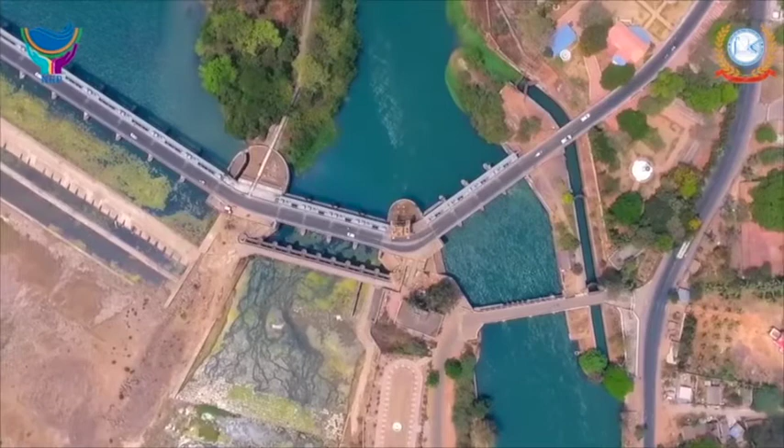Surface water level instruments. Water level measurement plays an important role in water resources management. In case of reservoirs, lakes and other water bodies, water level is used for determining available storage. In case of flowing rivers and canals, the water level represents flow rate.

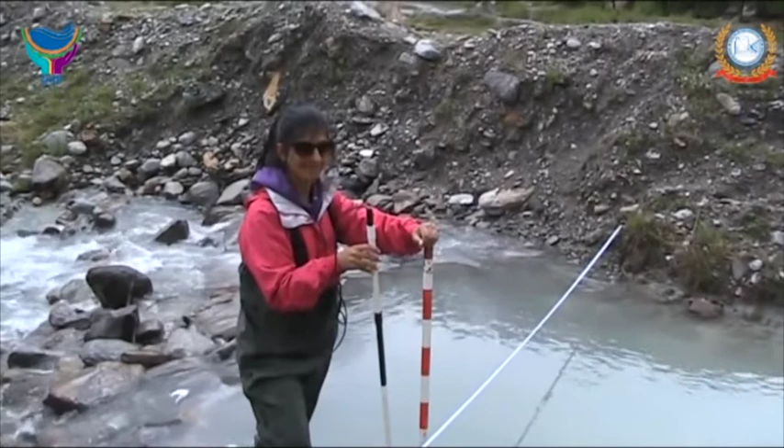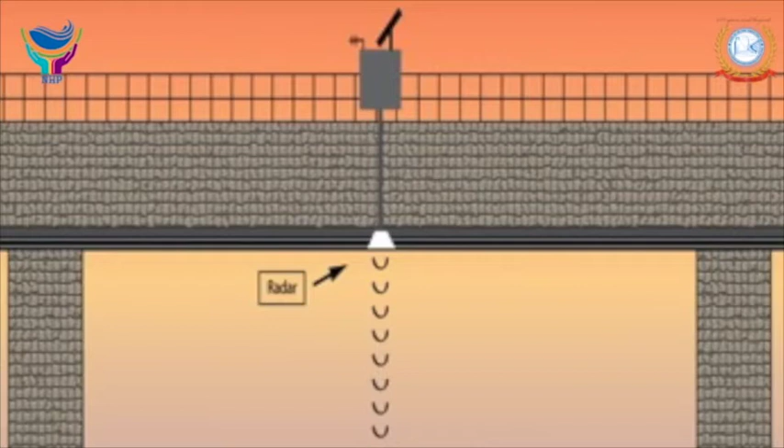There are several common methods to measure water level. Each method has advantages and disadvantages, along with the cost for purchase, operation and maintenance. There are two types of water level sensors: contact type and non-contact type. In non-contact type water level sensors, level is measured from a height as distance between instrument and water surface.

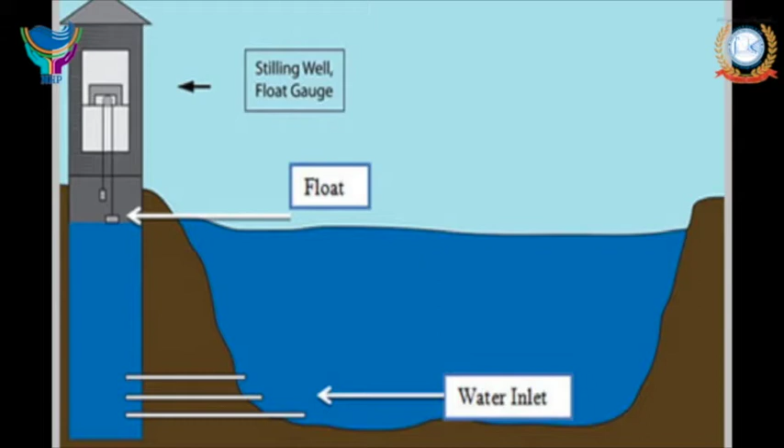In contact type water level sensors, the instrument is in direct contact with water and the water level is estimated as thickness of the water column above a reference level by measuring pressure exerted by the water column on the instrument sensor.

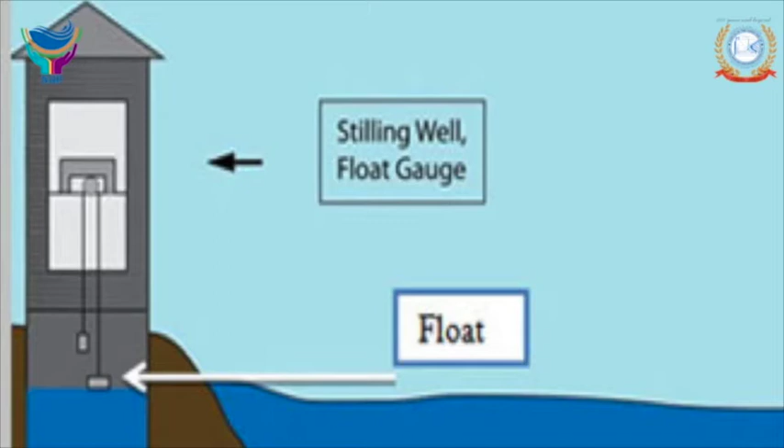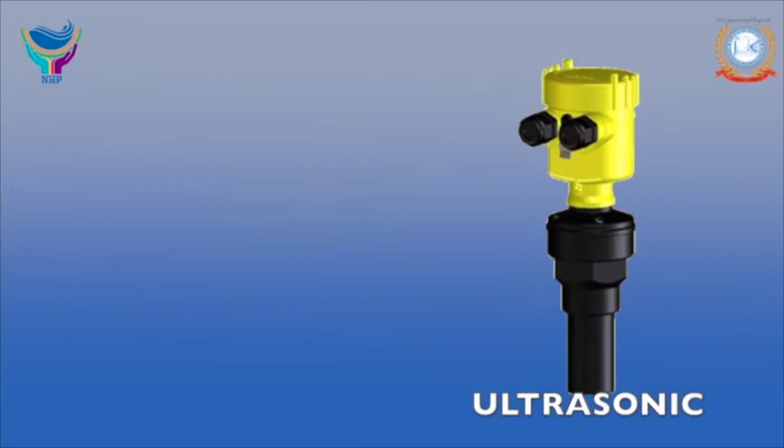A more modern approach to stage measurement has been introduced with ultrasonic and radar distance measurement sensors. And if it is feasible to move the site to a nearby bridge, these are preferred. Ultrasonic distance measuring sensors are comparatively inexpensive.

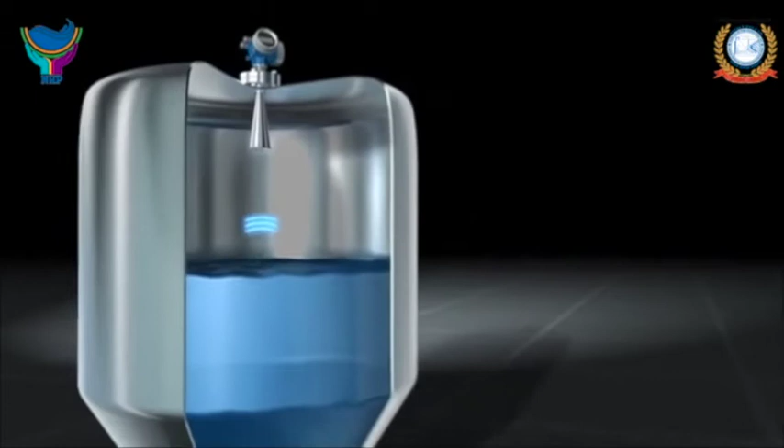The sensor measures the distance of target objects, that means water surface, by sending pulsed ultrasound waves at the object and then measuring the time for the sound echo to return. Knowing the speed of sound, the sensor can determine the distance to the object. The operator needs to know the exact elevation of the sensor and then subtract the distance to the water from the elevation of the sensor to arrive at stage.

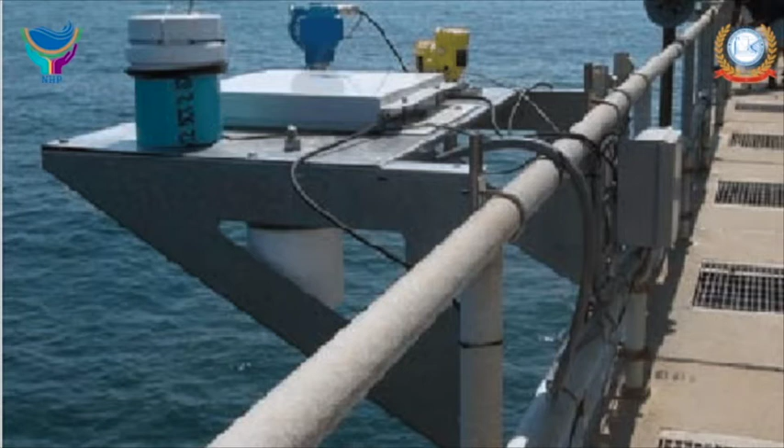The ultrasonic measurement of water level is one of the most sustainable approaches to measuring water level. It is a non-contact method of water level measurement, which means that what flows in the water and any water pollution will not interfere or otherwise foul the sensor.

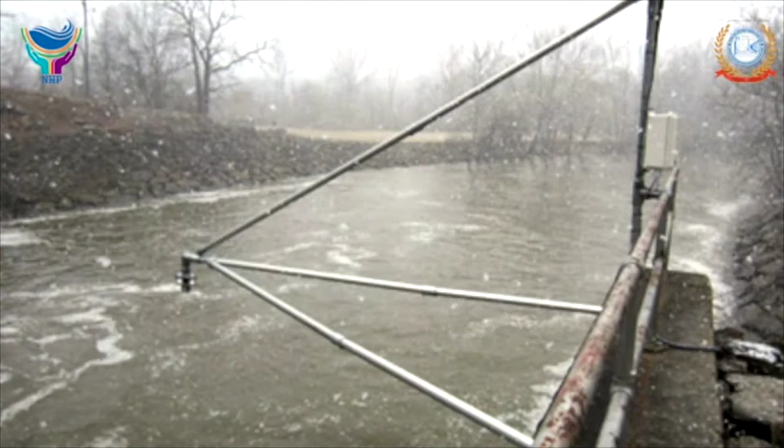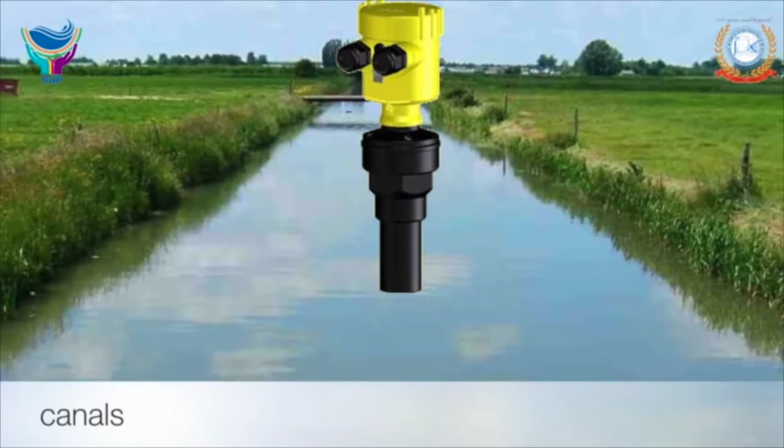The limitation of this method is that you need to make this measurement directly over the body of water being measured, which is not practical in reservoirs or rivers that have shallow slopes. The ultrasonic measurement is also a narrow-range sensor, limited to 10 meters in most applications. It is more ideally suited to canal measurements.

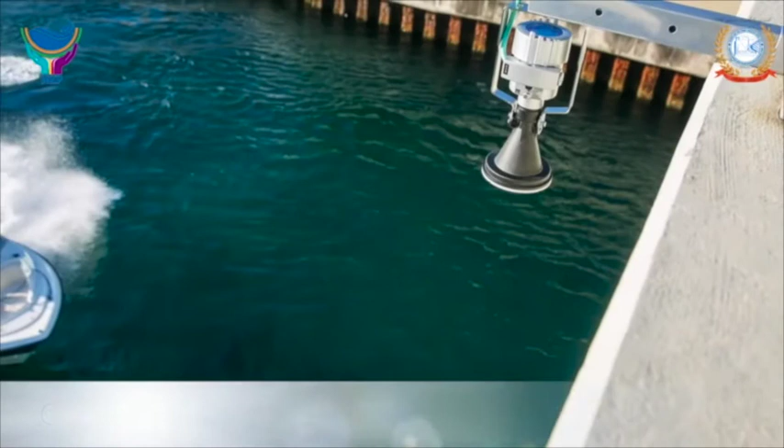The measurement is generally unaffected by the transparency, reflectivity, opacity or color of the target. Objects can be measured from 0.5 centimeter to 15 meters from the sensor. Disadvantages are that you need some structure to mount the sensor, a bridge railing or a boom, and the measurement is not as accurate or precise as other measurement techniques, usually being within 0.1% of full scale. This accuracy is generally sufficient on small bodies of water, such as creeks and small canals.

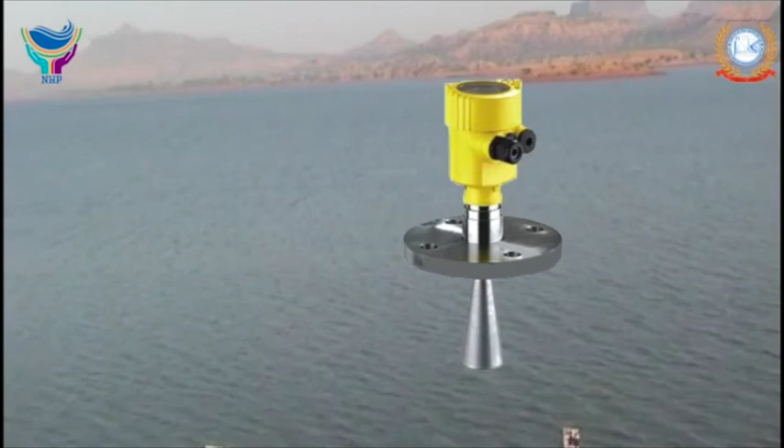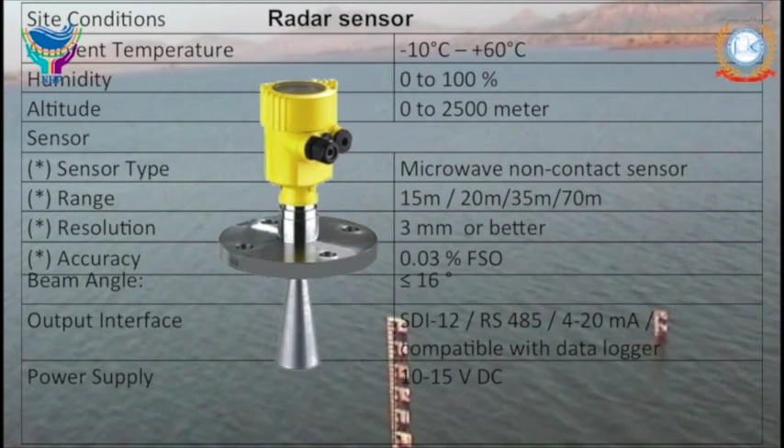In the event a larger distance needs to be measured or greater accuracy is desired, a radar sensor is available. The radar sensor improves the accuracy to approximately 0.03% of full scale and has a maximum range of up to 70 meters to the target. The advantage of using radar is the non-contact nature of the measurement along with high accuracy together with the extended range of measurement over the ultrasonic.

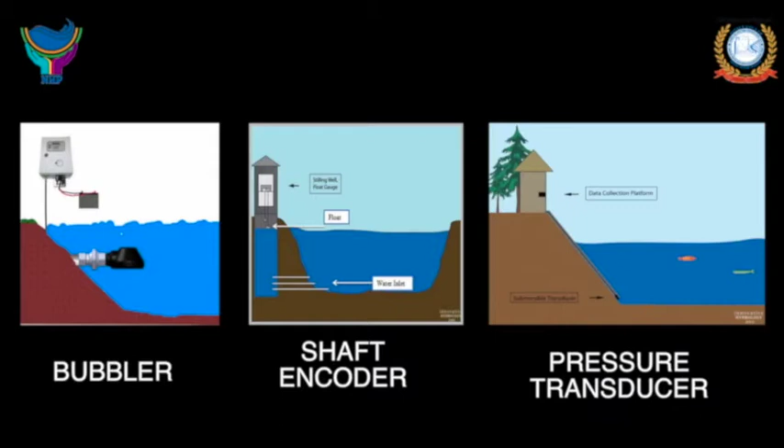The radar is also relatively easy to install. Disadvantages include the high cost of radar, along with the need for something to mount the radar on, such as a bridge structure. In contact type water level sensors, we have shaft encoder, bubbler and pressure transducer.

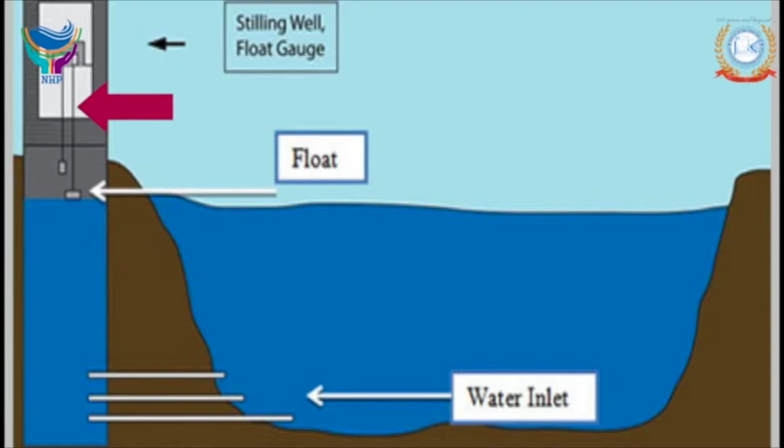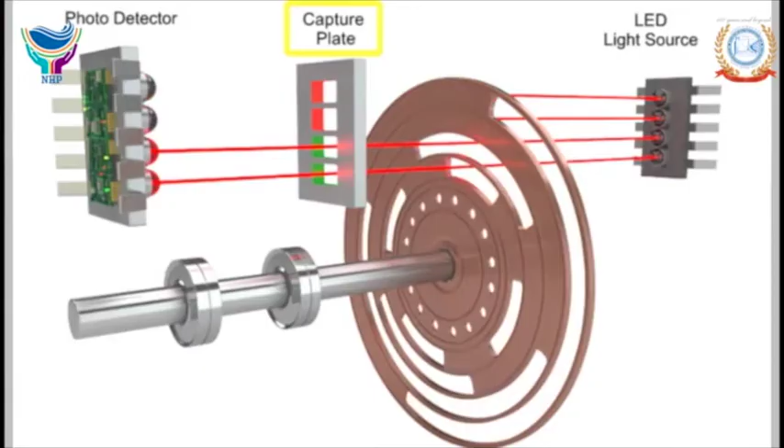The most common method of measuring water level is a stilling well equipped with a float and shaft encoder. The components for this type of gauge include a stilling well, inlet pipes from the water, float, tape, wheel and shaft encoder, which electronically sends signals to the data collection platform. The civil works for this type of station is among the most expensive, while the sensor and associated equipment is among the least expensive sensor solutions.

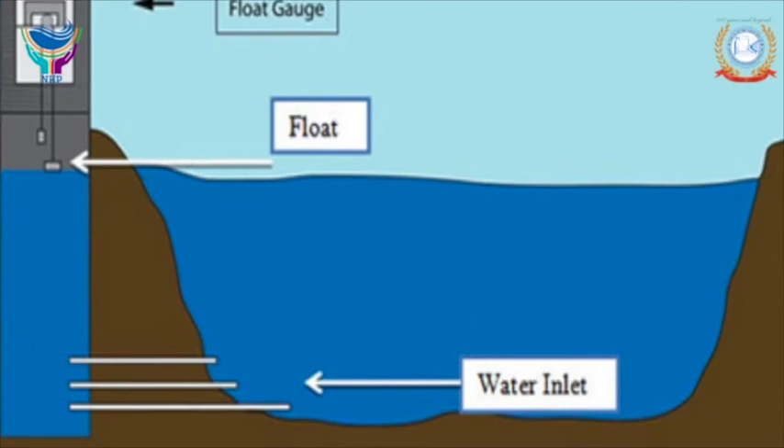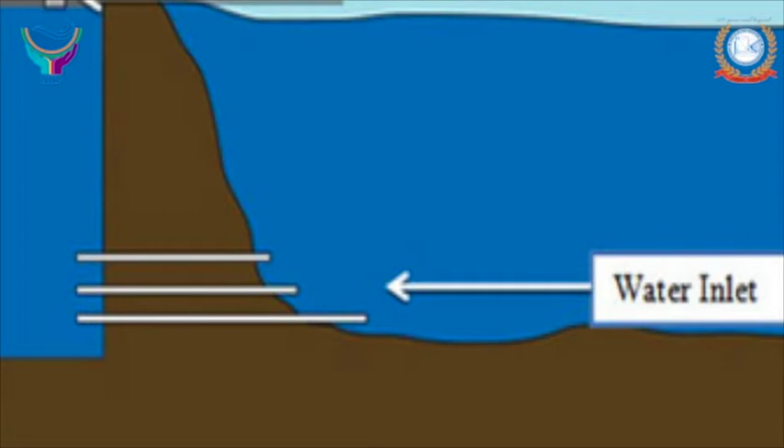The stilling well requires occasional flushing to remove sediments that may have collected at the bottom of the stilling well. If left unchecked, the sediments could eventually block the inlet or outlet pipes. This sensor never needs to be calibrated, but only checked and reset to an outside staff gauge. A staff gauge that covers the entire range of water levels is necessary to check the measurements of the shaft encoder.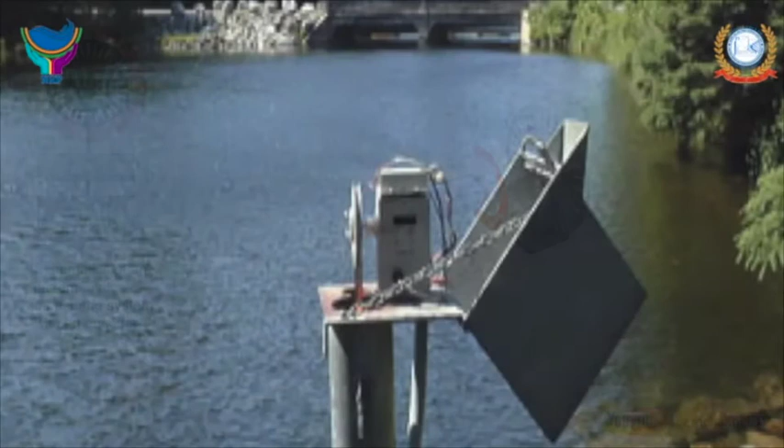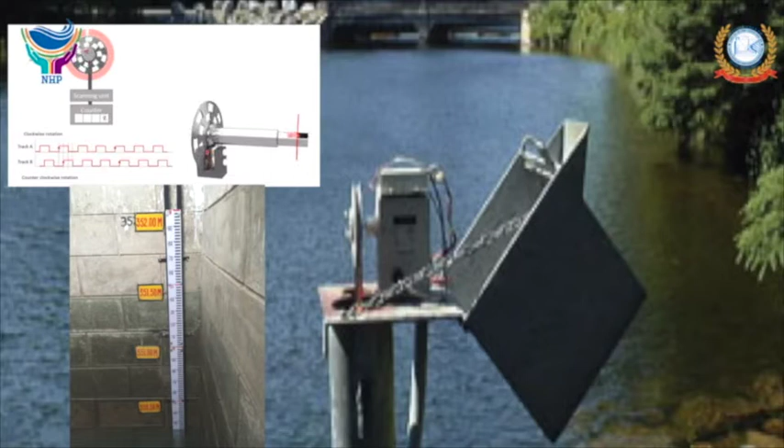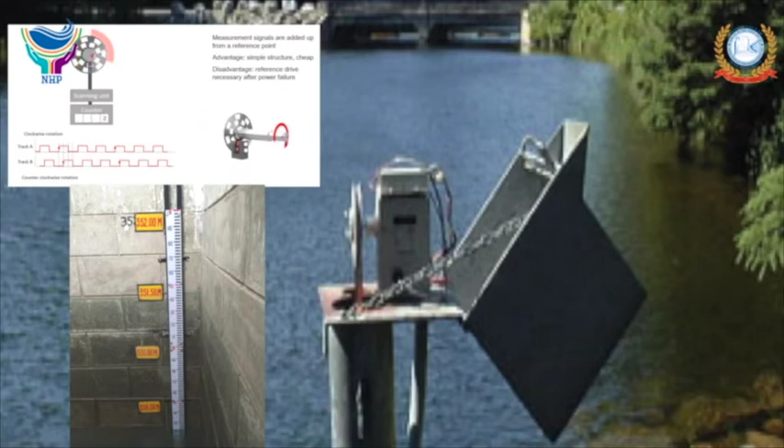The staff gauge is basically a ruler that is placed permanently along the shore or on some other structure. The staff gauge is used to compare to the reading of the shaft encoder, allowing the operator to correct the shaft encoder to the staff gauge. A visual comparison between staff gauge reading and the data collected by the data collection platform is made during every visit to the gauge station and recorded in a log book, which should be placed at every gauging house.

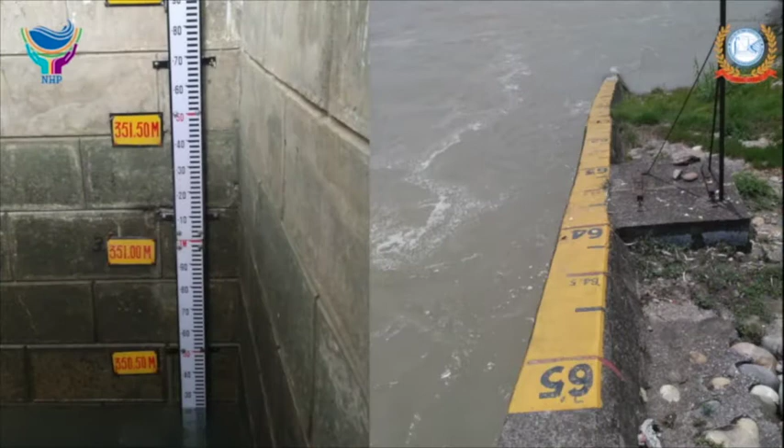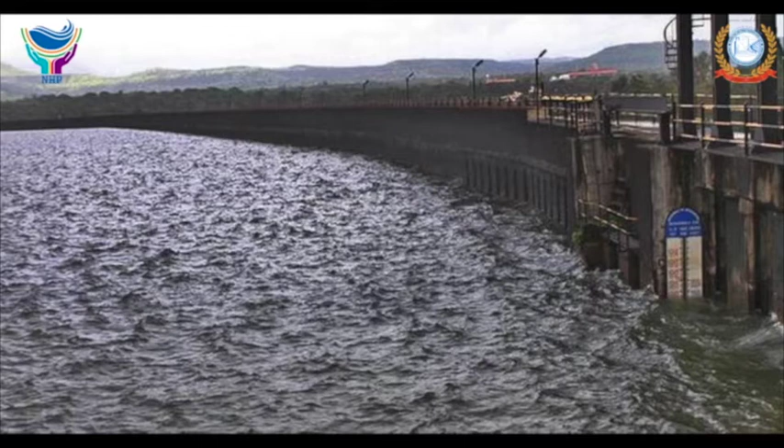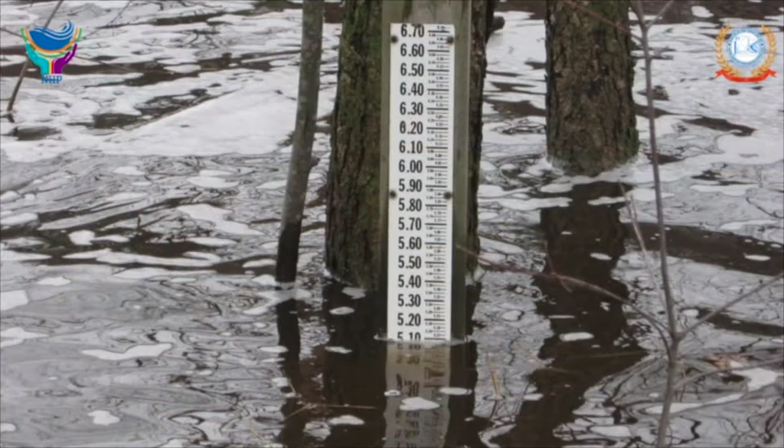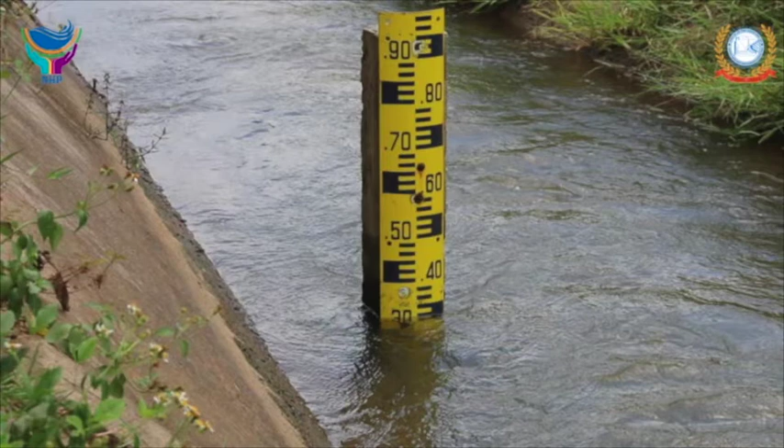The staff gauge has two sections, conveniently placed for easy readings and easy installation. Some staff gauges that are in rivers or reservoirs may have numerous sections to cover a large range of water levels. Staff gauges are often damaged during flood flows, but fortunately are relatively inexpensive to purchase and place in the water. Staff gauges should be surveyed after high flows to assure the debris has not damaged the staff gauge or otherwise altered the indication of the water level.

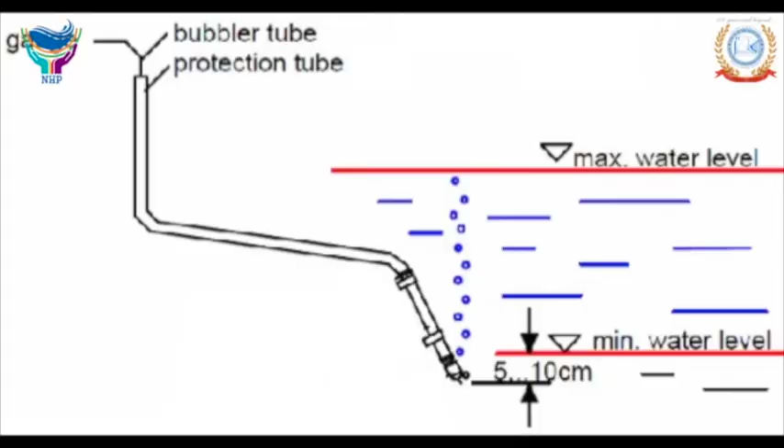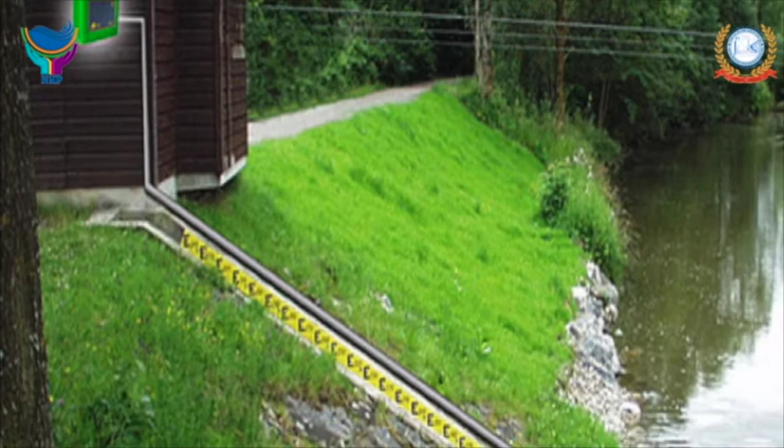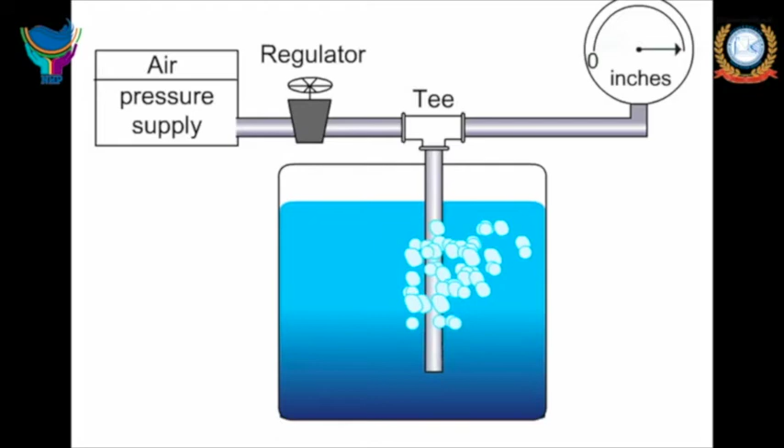Another method of stage measurement is the bubbler system equipped with a non-submersible pressure sensor. This is also known as a gas purge system. A small quantity of air or inert gas, for example nitrogen, is allowed to bleed through a pipe or tubing to an orifice in the stream. The pressure of the gas that displaces the liquid in the orifice is then measured by a pressure sensor.

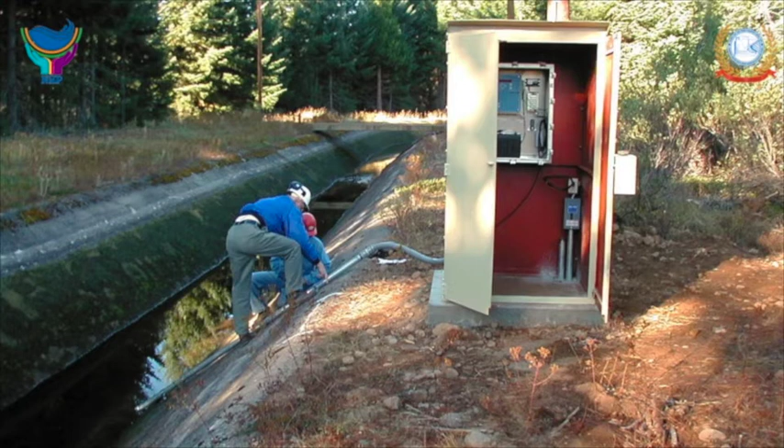The main advantages to a gas purge system are that this technology does not require a stilling well and the large associated cost of installation. Another advantage is the sensor is not in contact with the water, which means any debris in the water won't cause damage to the most expensive part of the bubbler system, which is the pressure transducer and compressor. Many manufacturers now produce compressors with tanks to store the compressed air for the gradual release of air into the orifice line. The equipment can conveniently operate with a small 12 volt battery that is charged by solar power.

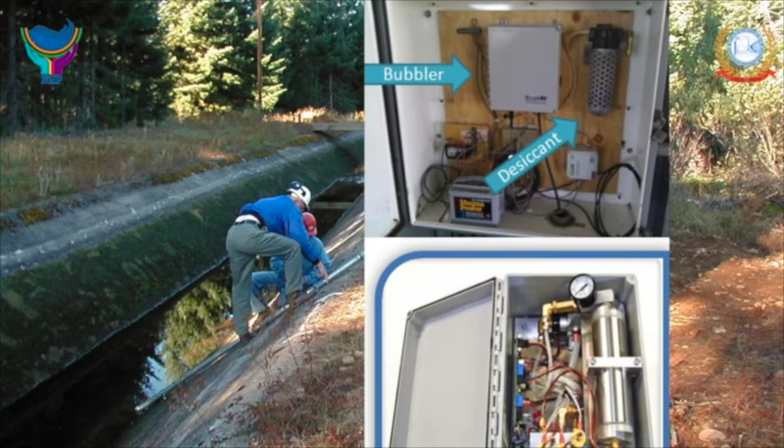The main disadvantage of this system is the cost of the pressure transducer and gas compressor storage system. The desiccating system that is normally needed to keep water out of the compressor system is a recurring maintenance item. Bubbler systems work well in open channels as well as reservoirs.

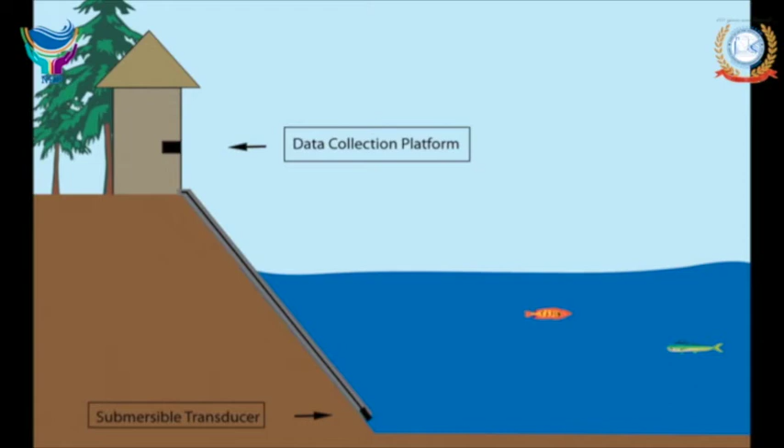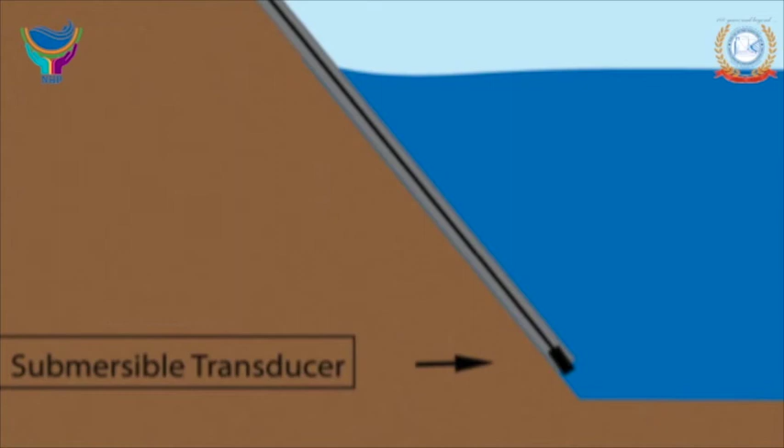Another method to measure water level is to use a submersible transducer. In this instance, a transducer is installed in a pipe below the minimum water line. The pressure exerted on the sensor by the head of water above the sensor is converted to depth. The main advantage of a submersible pressure transducer is that the sensor requires the simplest installation, as the sensor only needs to be run down a pipe to some level that is lower than the expected minimum water level. The submersible pressure transducer is also one of the lowest cost sensors for water level measurement.

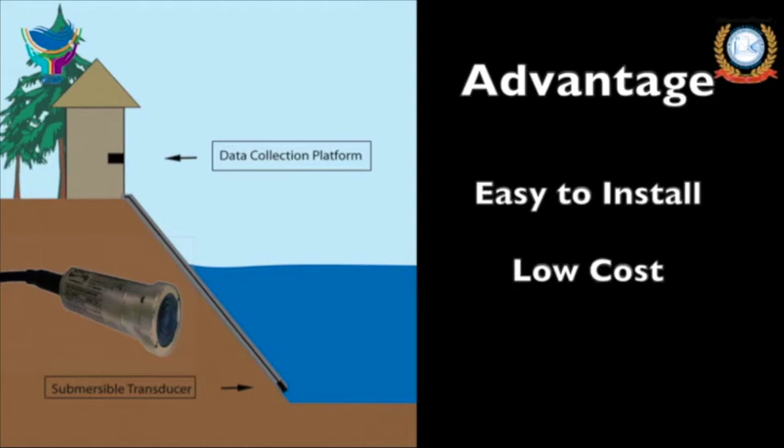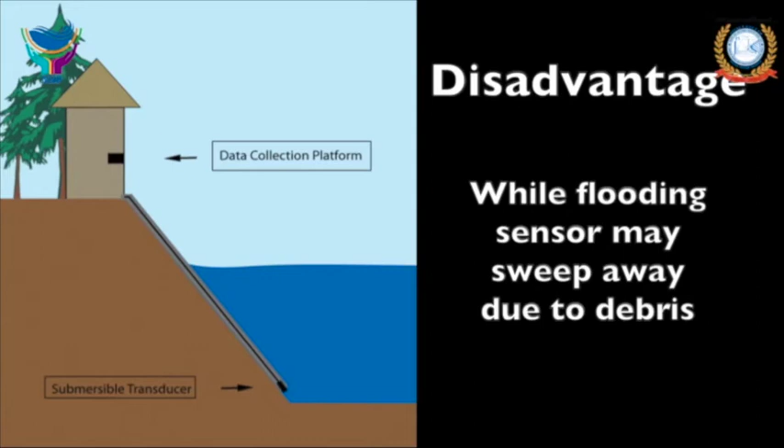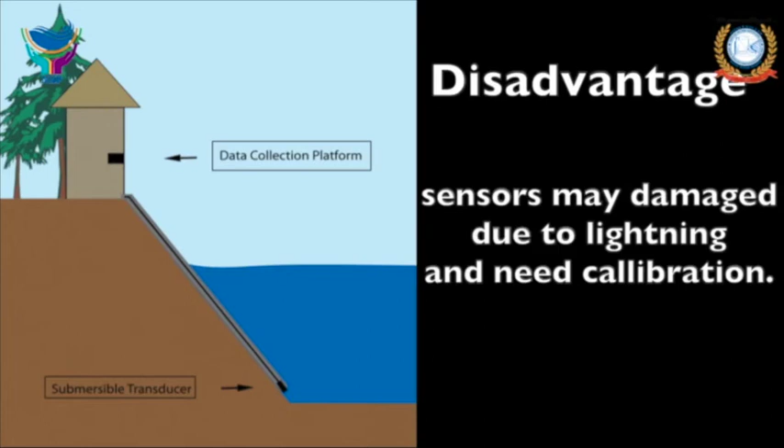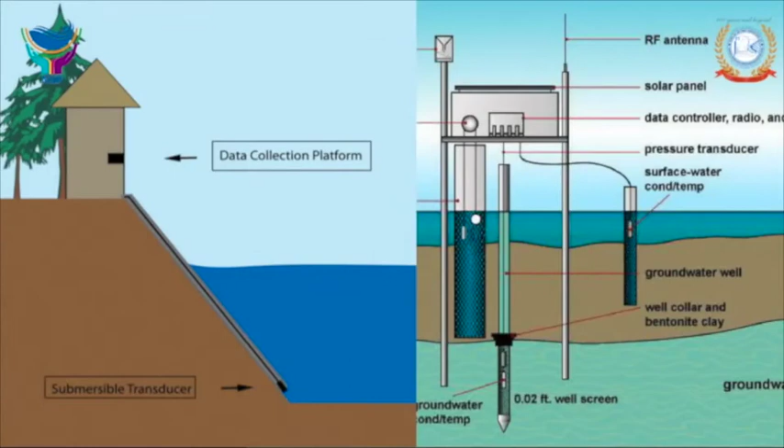The main disadvantage is the sensor is in contact with the water and all debris in the water. In the event of a flood, the debris in the river can sweep the sensor away. These sensors are more susceptible to damage caused by lightning striking the water and also need calibration that usually requires the sensor to be sent back to the factory. A submersible transducer should be avoided in open channels and is more appropriately used in wells to measure groundwater or in lakes, where the occurrence of damaging debris or toxic water is not an issue.

A common problem with submersible transducers is evident when installing the sensors in lakes. Lightning that strikes the lake can damage the sensor if the sensor is not properly protected. There are manufacturers that warranty their sensors for the life of the sensor to lightning strikes if you employ the proper grounding techniques that they provide.

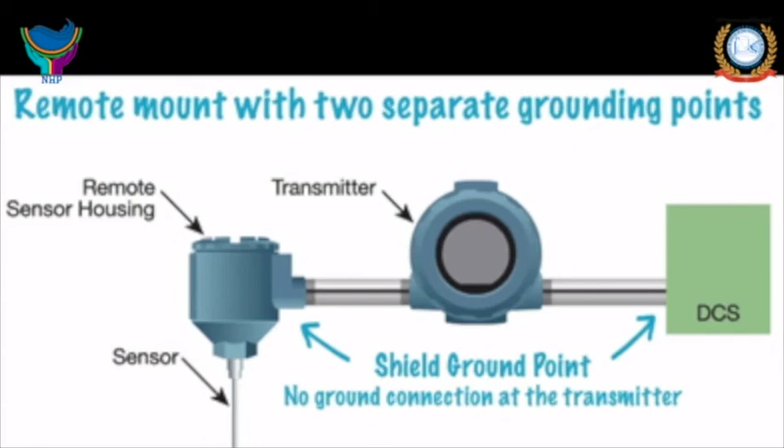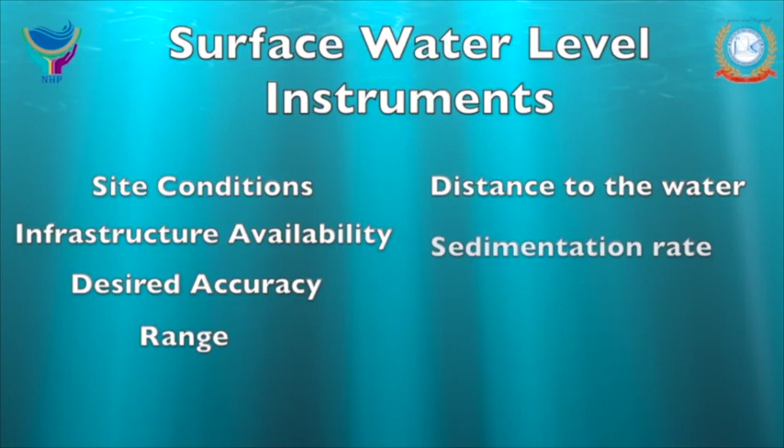To summarize the main points of surface water level instruments, the selection of appropriate instrument technology depends on site conditions, presence of existing infrastructure, for example, stilling well or bridge, desired accuracy, range, distance to the water, sedimentation rate and cost of the instrument.